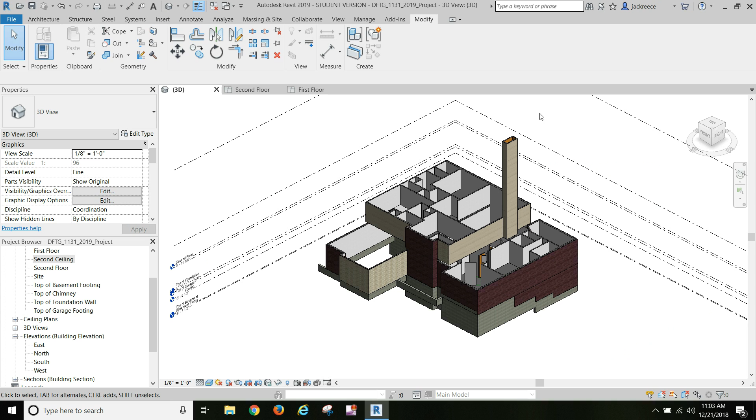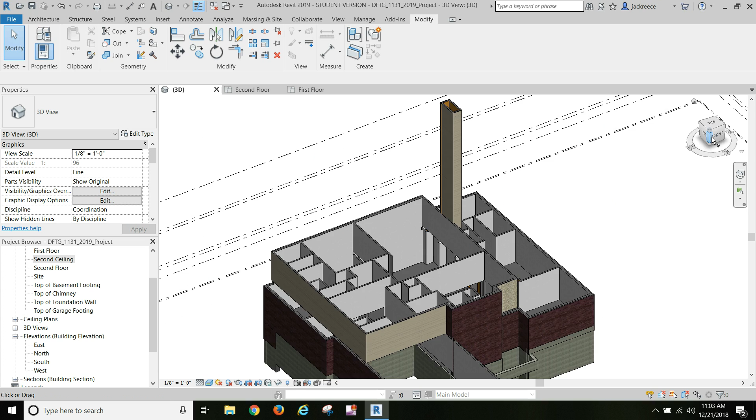fixed up. I added a level for top of chimney, and I made it really tall. And once we get the roof in place, then we'll adjust that down. I may have to work with that wall joint right there, but we'll join the walls to the roof as they come down. So I wanted to show you that we got some interesting wall things here going on. And the roofs that we put on will cover a lot of the gaps, and then once we put the floors in and stuff like that.

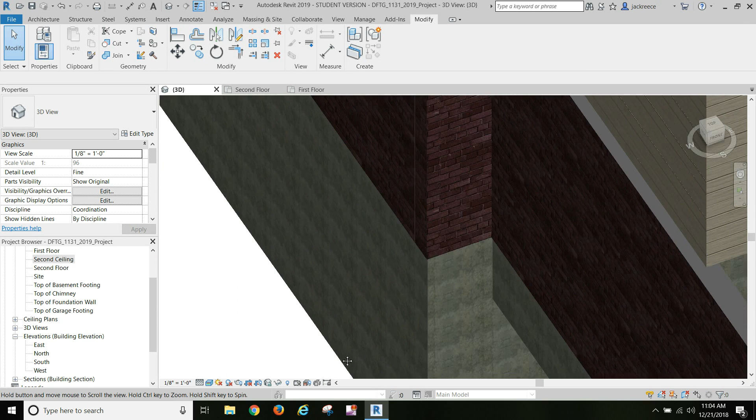So this is going to be an interesting project. It's been interesting getting the walls built. If you want to do it on your own and go ahead and build the walls, it'd be a good exercise. This is kind of complex, a lot more so than the house you did last semester. But I wanted to show you in this video these angled walls. Angled walls are hard to get exactly right in Revit.

And the best way I have found to do it is to draw model lines. They're kind of hard to see on the screen, but I've got these green model lines in place where I want the walls to go, and I've got them dimensioned and locked for the model lines. And then I get my walls put in place that I know I'm going to have. Interesting little thing, we've got these corners right here that come up, so there's no gypboard on the inside, so we've got a variety of different walls and splits and things.

And so I got a model line here for that 4'6" dimension. Got one here for the 1'8" dimension. This one's at 45 degrees. And this wall here, I got a model line 45 degrees. I've got it dimensioned at the 8'8", 5/16, the 4'7" for there. A model line here for the end of this wall coming down, and a model line here for this one. Now these things are just cantankerous. They're hard to deal with.

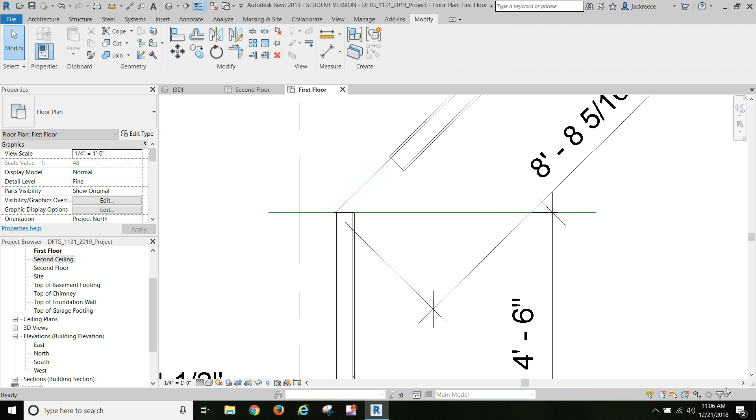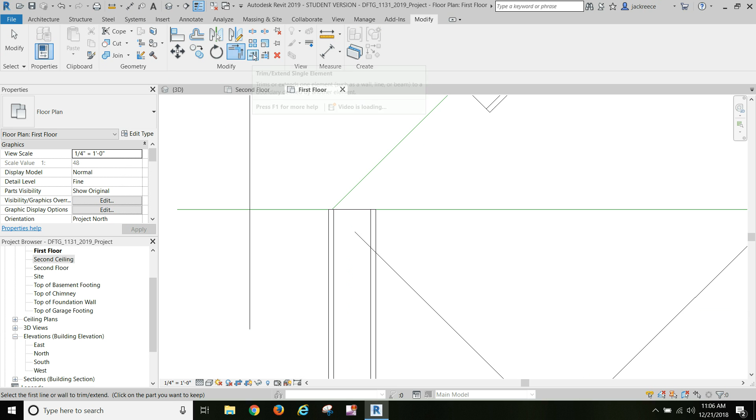So I'm going to start down here with this one. I'll just show you. So if I just drag it on down and drop it. Okay, I don't want to remove my constraints. I don't know if you could see the way that it tried to join right there. Wrong one. We'll try a miter and see. It shows it wants to change the constraints. So we'll try extend, and it still wants to change the constraints.

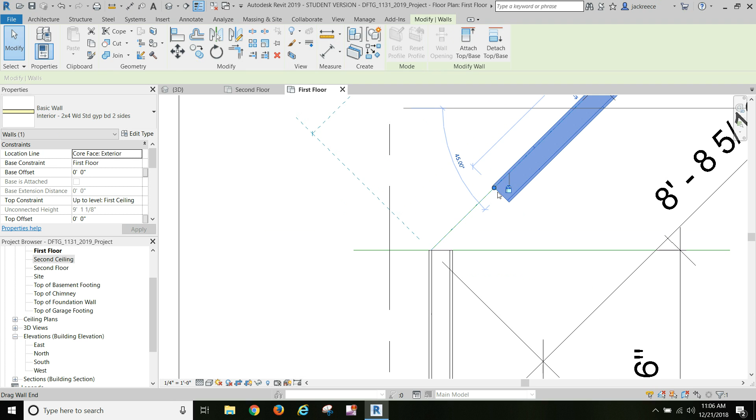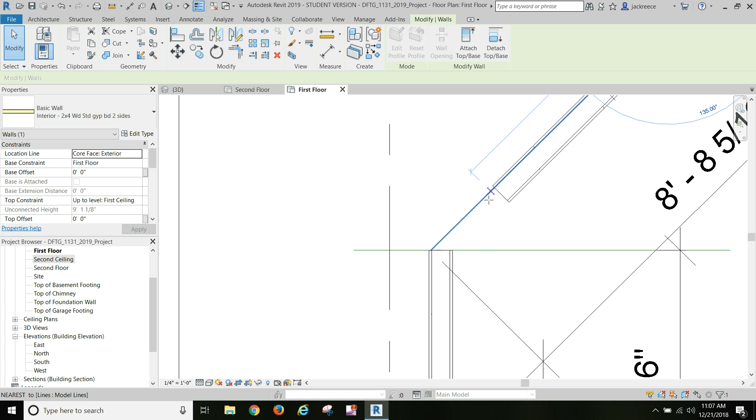Just the way the walls join. Okay, so that's got my marker on the exterior, and that's got my marker on the exterior. It's just hard to get them right. Now that's a weird constraint. Okay. Something moved. Because that model line was right there.

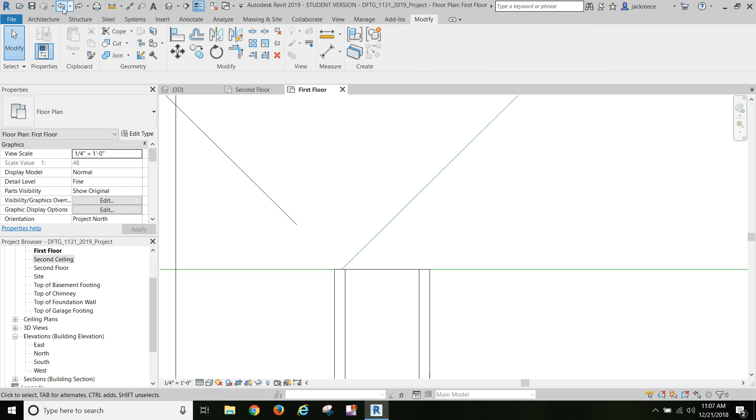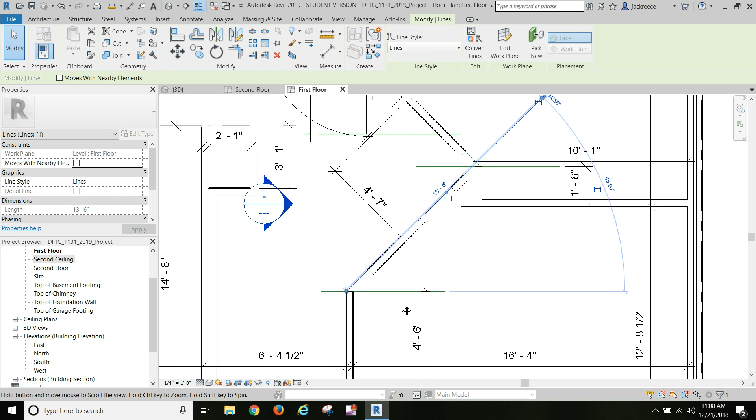Hmm. Well, I tell you, it's just hard to deal with these things. So when you get the file, if you notice the dimensions are slightly off, that will be the reason why.

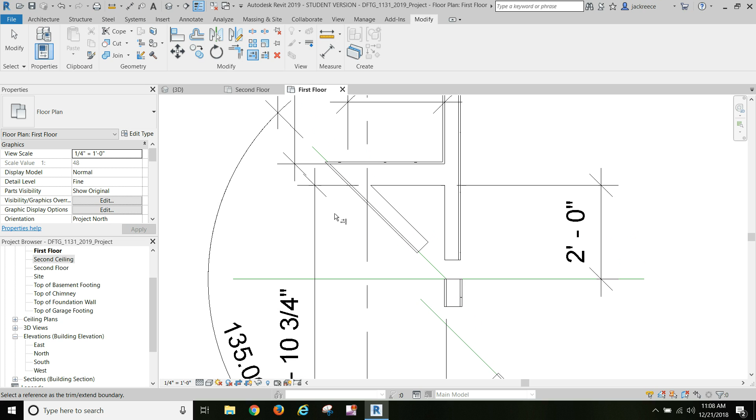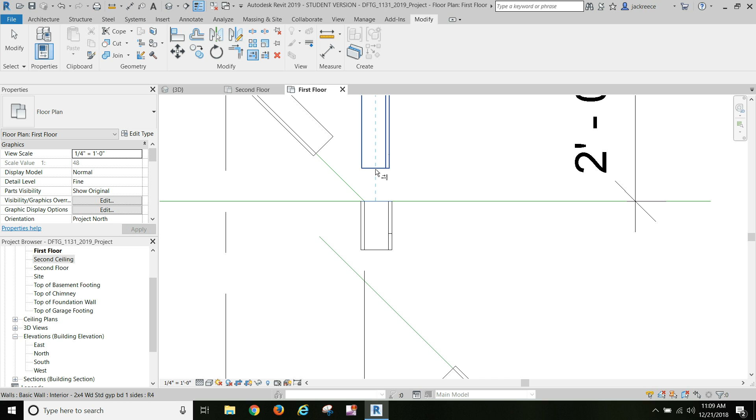All right, well, we'll work with this one, okay? And so it did that. My dimensions are still the same, but I don't want that join. So I go to my wall joins and I select that, and I think the square off is the right one, yeah. Okay, and so if we come to this one, well, now that's kind of interesting. I think that wall moved when I was messing with this stuff here.

It's very frustrating. It takes a lot of time to get these things right. So I just wanted to show you that in a video, and I will get them fixed before I put this file up in Blackboard for you to download. But if you're dealing with angled walls, you got to draw model lines and get all of your dimensions and angles and constraints, and then work it out and play with the wall joins tool to adjust the way that the corners join together.